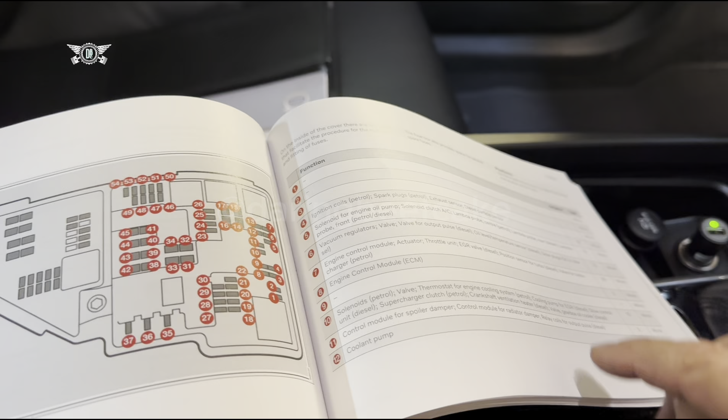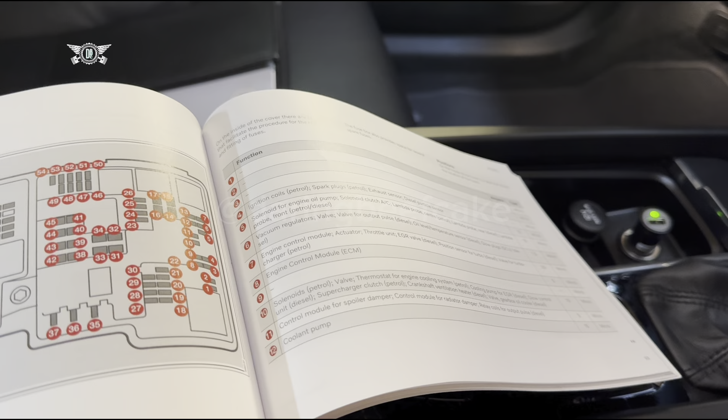On today's video I have this Volvo XC60, a 2019 model. I'm just going to show you the location of the fuse boxes and the list of what the fuses are for. I'm going to film the list so you can pause the video and look at each fuse, what they're for, the ampere rating, and whether they are micro or MCase fuses.

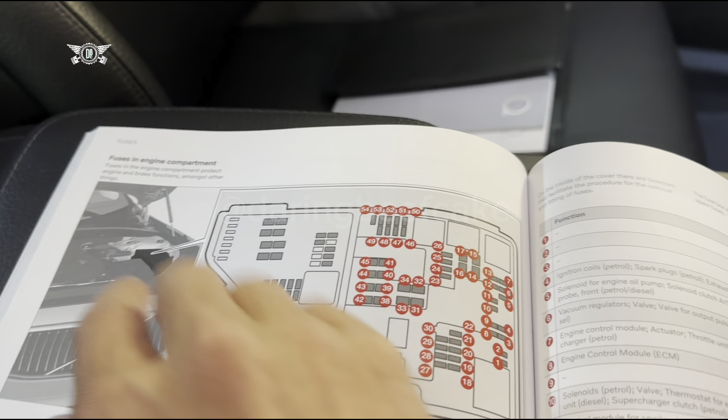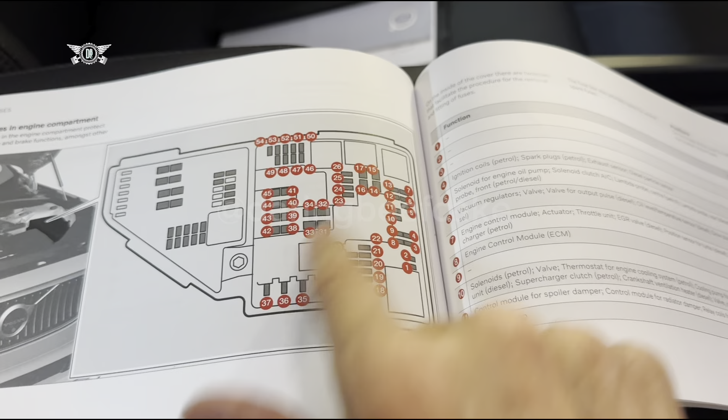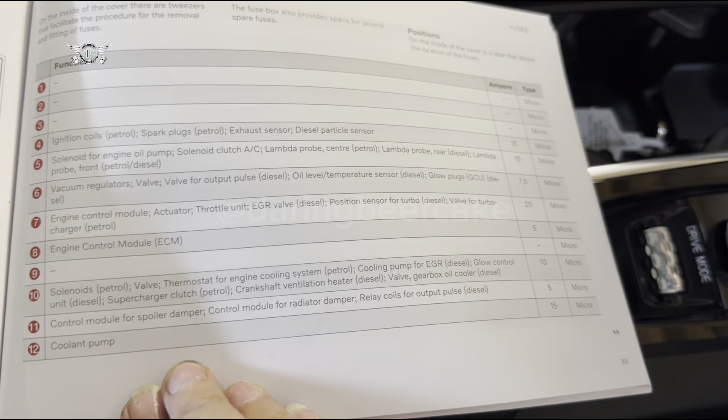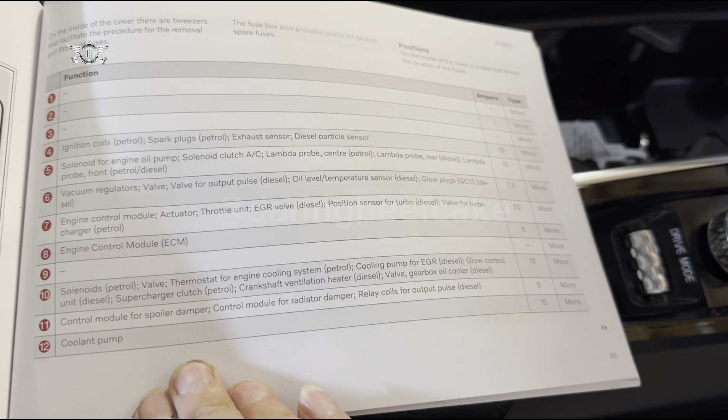This car has a fuse box in the engine bay or engine compartment, as it says there. It looks something like this. It also has some relays, but the relays are not really shown here what they're for. In this page it shows you fuse number 1 to 12, and numbers 1, 2 and 3 are actually not used. Depending on the car, the model, and what features your car may have, you may have more fuses or less fuses. So fuses that are not in the fuse box doesn't mean they're missing, it just means those features are not available unless somebody removed them purposely.

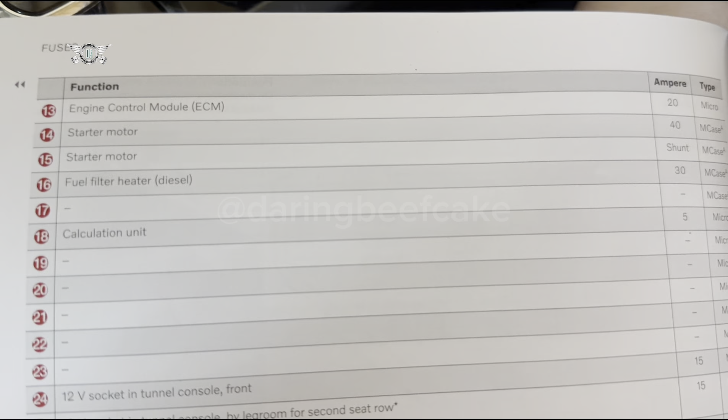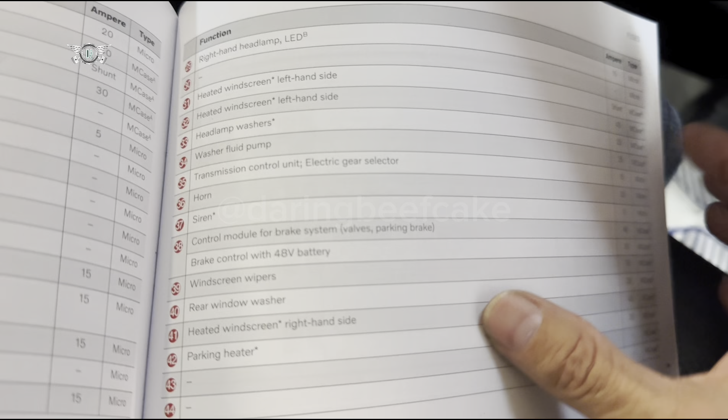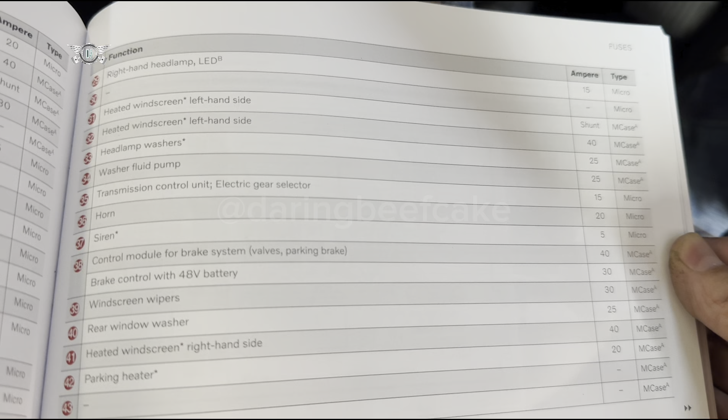So that's our first page. There are some spare fuses as well. Let's have a look at the second page here, where it starts at number 13, and this goes down to fuse number 28. Then we have fuses between 29 and 44 there. And we still have some more here.

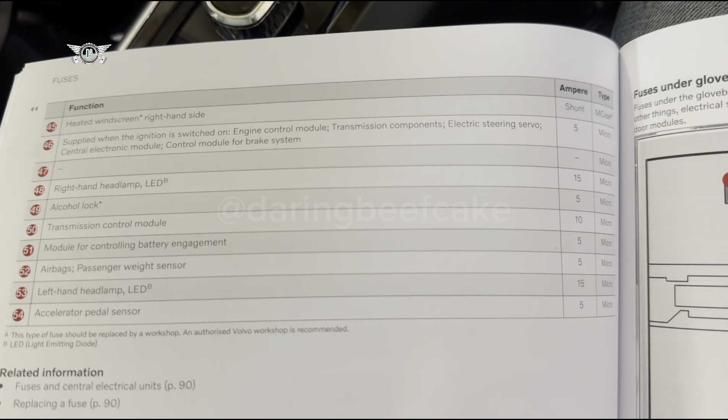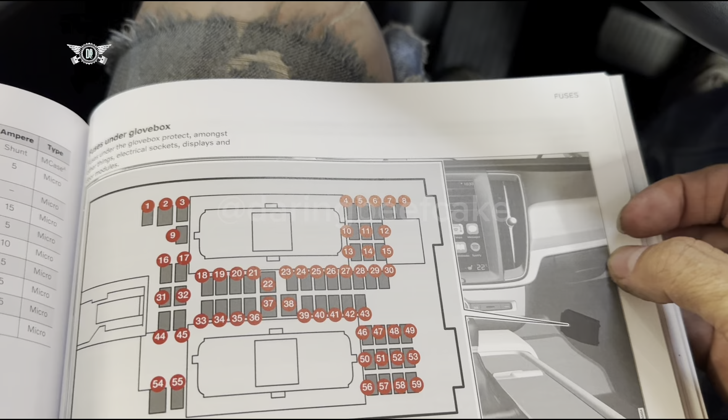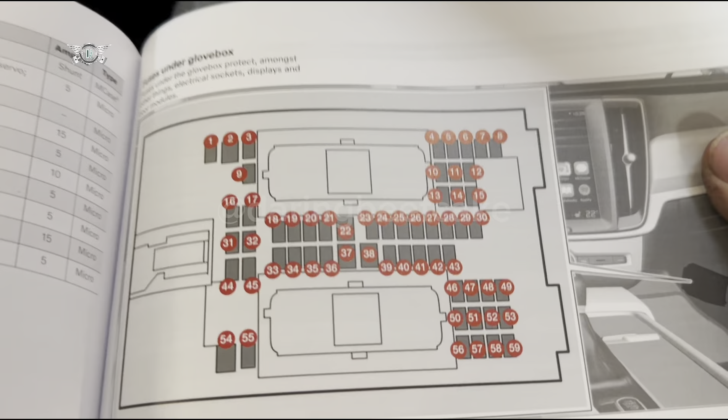Then we have fuses under the glove box, and it shows you a picture of the glove box on this side. This car is right-hand drive, so the glove box is on the other side, unlike in this picture, but it will be the same sort of fuse numbering. That's what it looks like, that's how they're numbered. And we can have a look at what they are for.

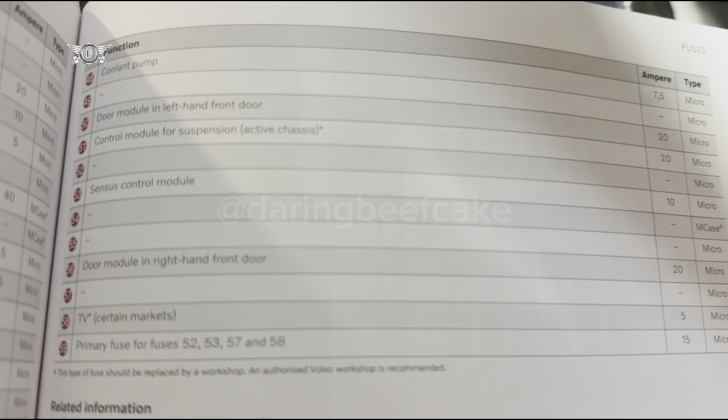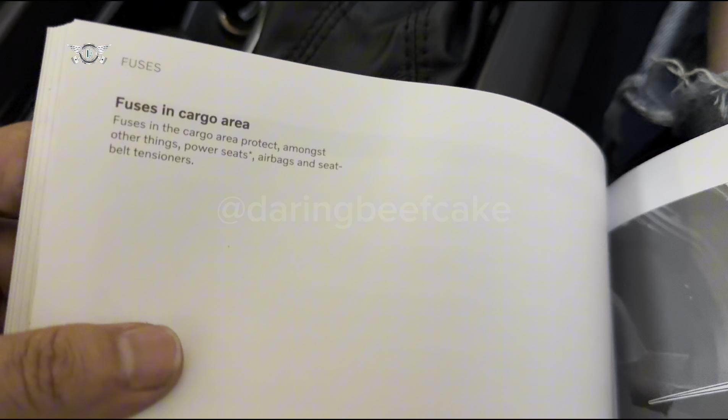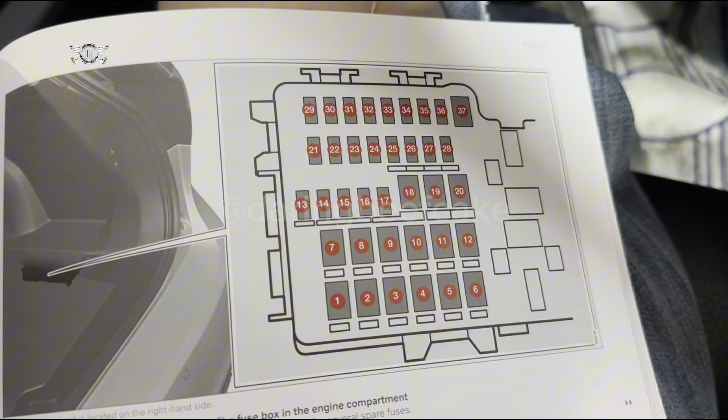And then we have fuses in the cargo area. That's where they are supposed to be. It says on the inside of the cover there are tweezers as well that facilitate the procedure. The central electrical unit is located on the right hand side, so we'll have a look at that as well, and then we can see what they're for.

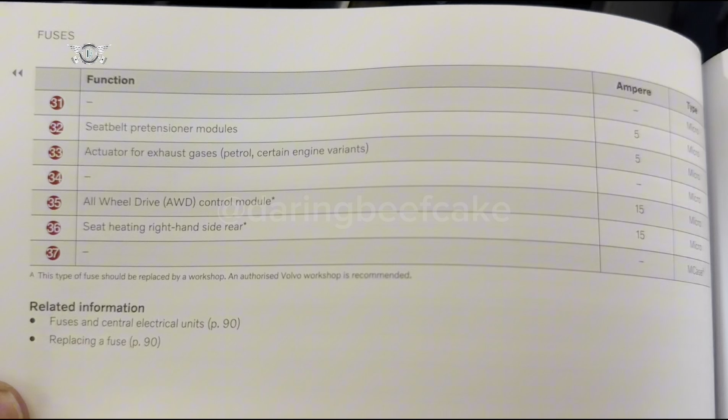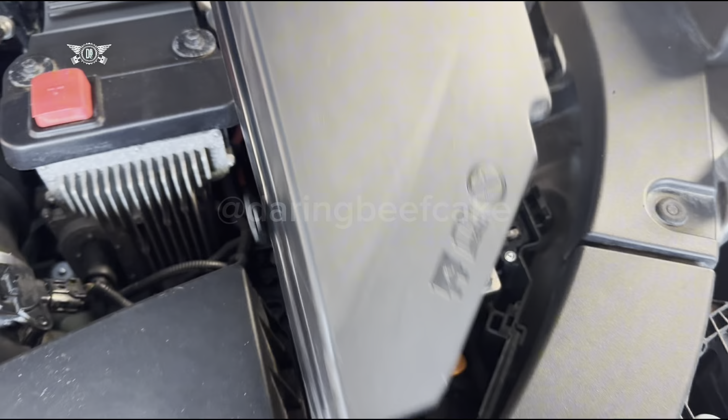Okay, so now we can investigate where these fuses are. We're going to go to the ones under the bonnet first. So obviously you have to get your bonnet open, and then we're going to come this way, and it's going to be under here. There are some clips that you need to press in order to get this fuse box open. In there are your fuses and a few relays. There's a little key for replacing fuses.

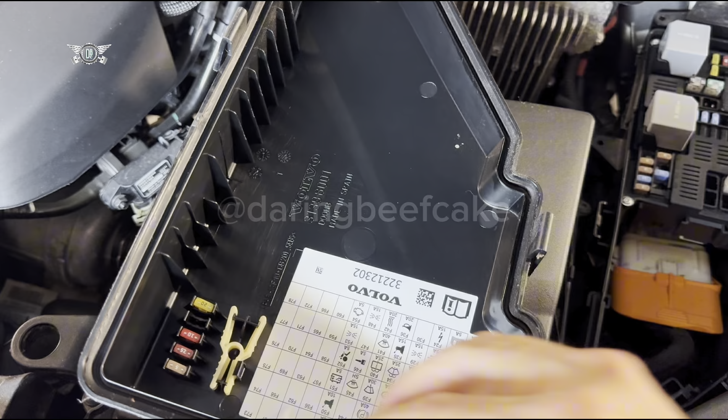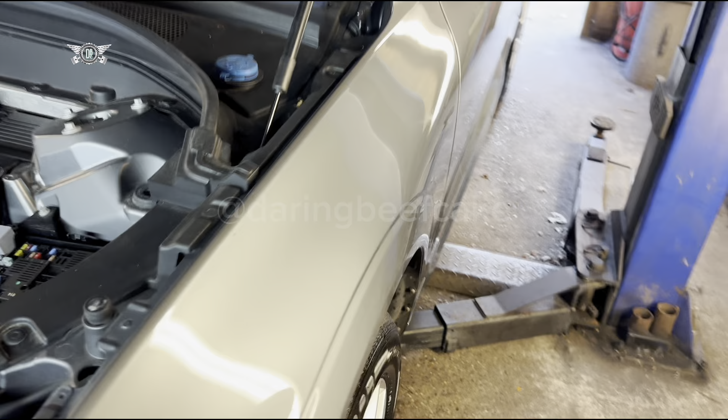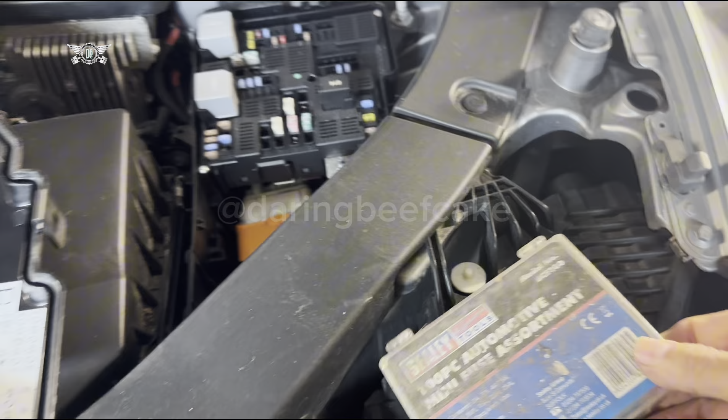In my previous video I changed fuse number 15 here, which was for the 12-volt charging socket, so that's why that one is missing. But I'm pretty sure I have loads of little fuses that I'm just going to refit before I forget. I don't have a micro one though, these are very little micro fuses. I may have one somewhere, but anyway, for now let's concentrate on the video.

So this is the fuse box in the engine bay. Now we're going to have a look at the ones that are supposed to be in the passenger side.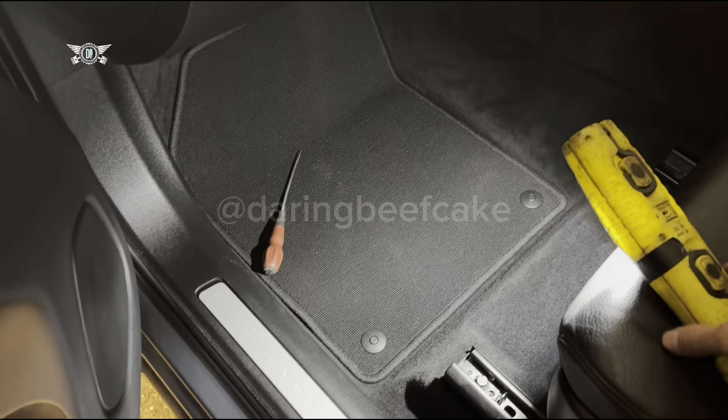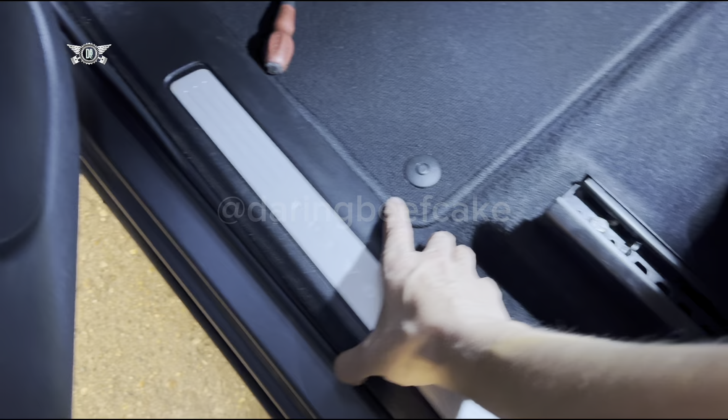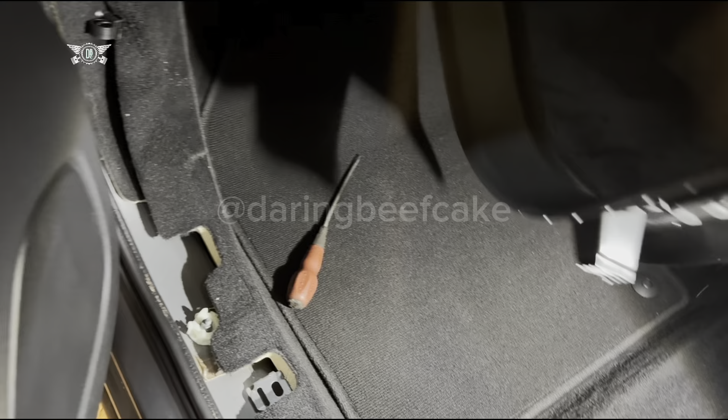Okay, I was just getting my light here. In order to access the fuses that are sitting in this panel, they're going to be sitting behind this bit of carpet. So we need to remove this cover here, and that cover sort of pops up, it literally pulls out, and it may sound like you're breaking something. It's not kind of breaking, it's unplugging from there. So these metal clips here unplug, and this comes out.

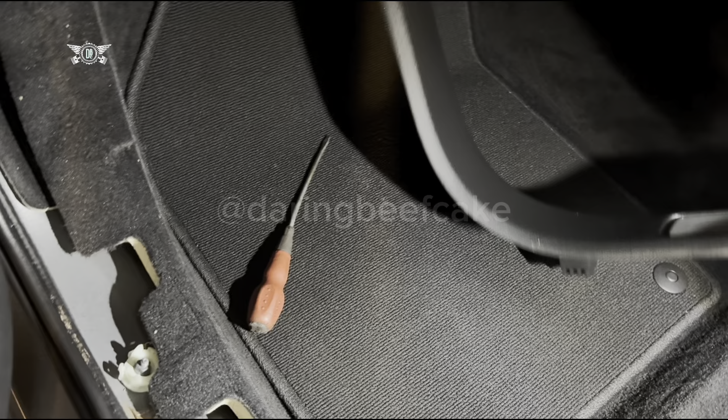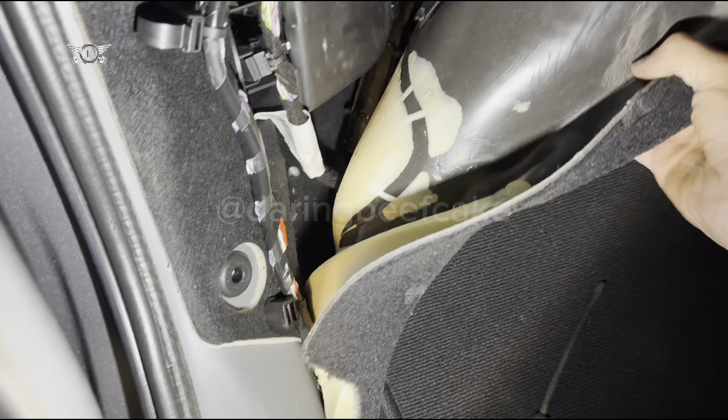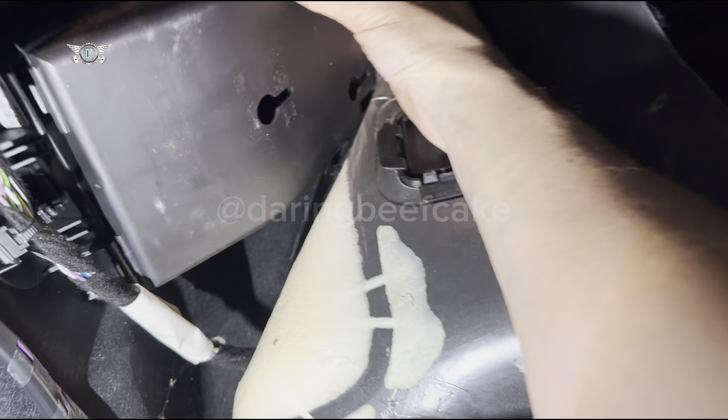Once that comes out, if I can get my light here, if we open this carpet a little bit, we're going to find this cover, and behind that cover is where the fuses are, which looks like this cover was a bit loose already. But anyway, let's take that out, and we can try to wiggle this cover out of here. It clearly needs to swing.

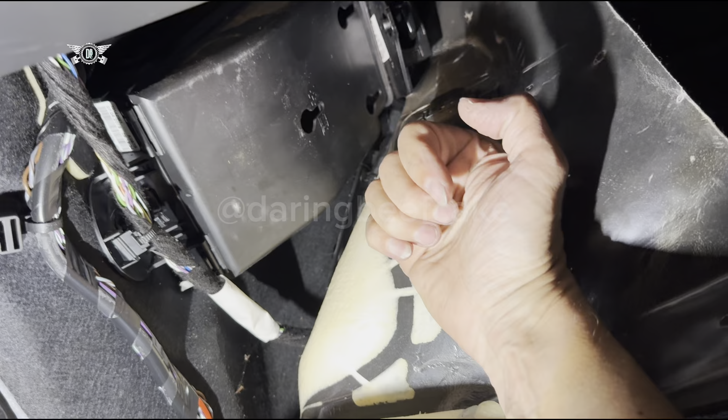I can see it's got little hooks here, so it needs to swing. I'm going to try to do that with my two hands. Okay, yes, just push this down and it will swing out, and that's where the fuses are. And that's the cover. There's some tweezers there as well to get to the fuses. And obviously you have the fuse list, and they are numbered as well. You can just about see the little numbers there.

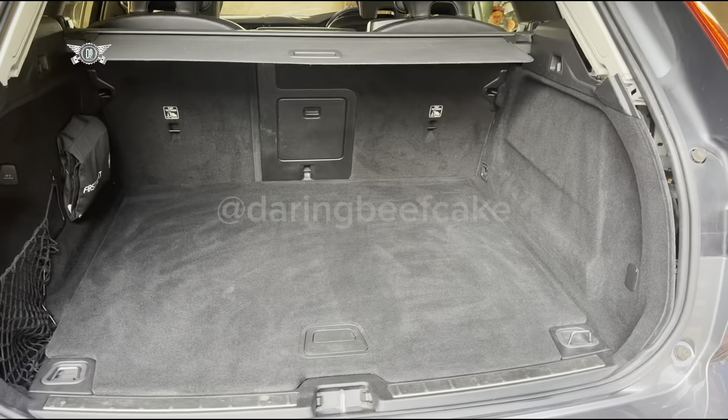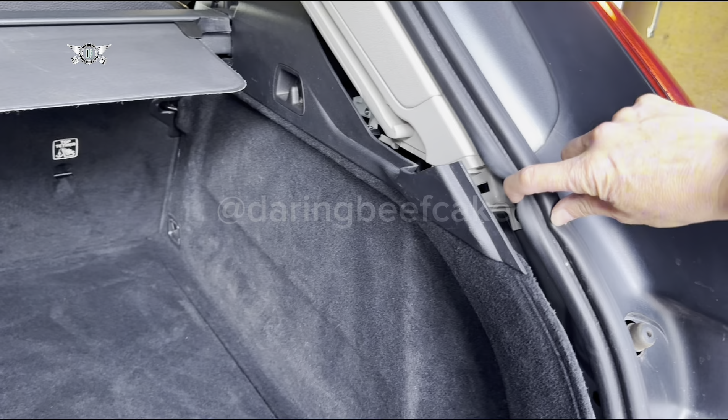So now I'm going to fit this back, replug all these, and I'll show you the ones at the back. Right, fuses at the back. If you open the back hatch and come to the right hand side here, if you pull this rubber open a little bit, you'll be able to get your fingers in here and pull this out. Again, this is just plugged in there.

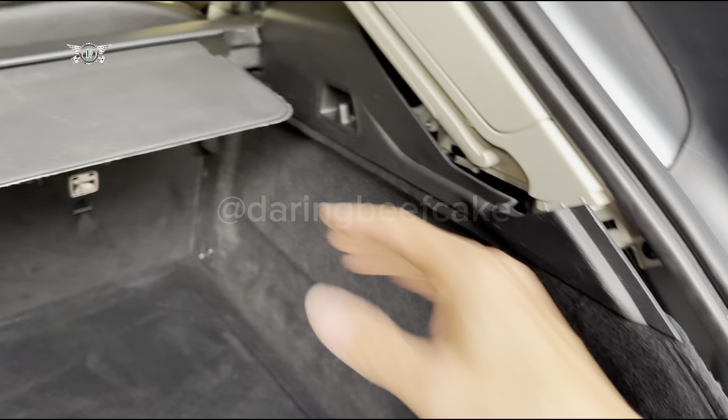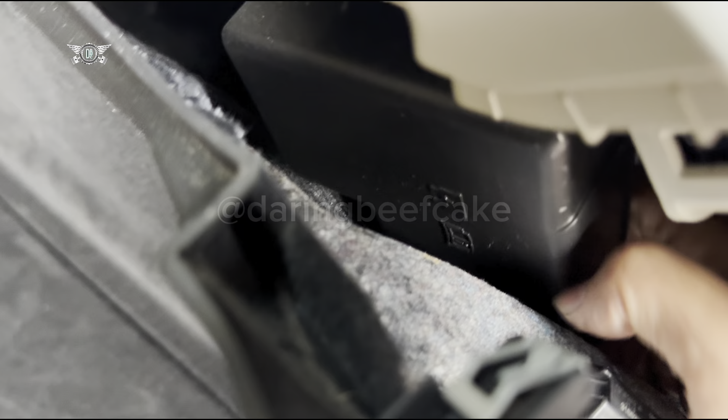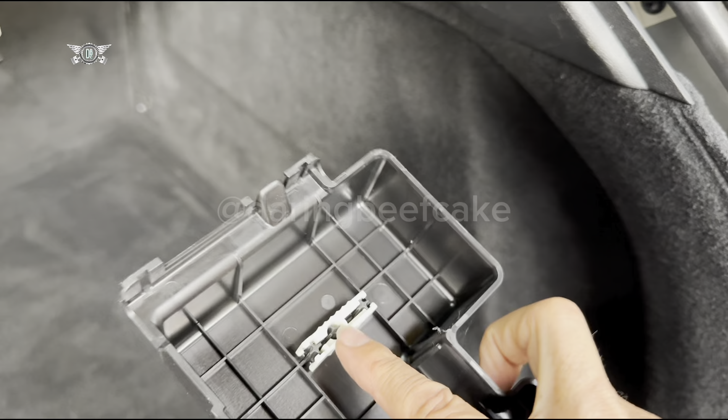So you can unplug it, bring it out a little bit. It would probably be easier if you remove this out. If you take it out, then this might open a little bit more. But I just want to show you where the fuses are, and they are in there behind this cover here. If you take that cover out, it comes out very easily as well, just have to press on that little clip there, and it will come out. There are some tweezers there as well, and that's where the fuses are, and one relay. So there isn't many fuses there, it's just a few.

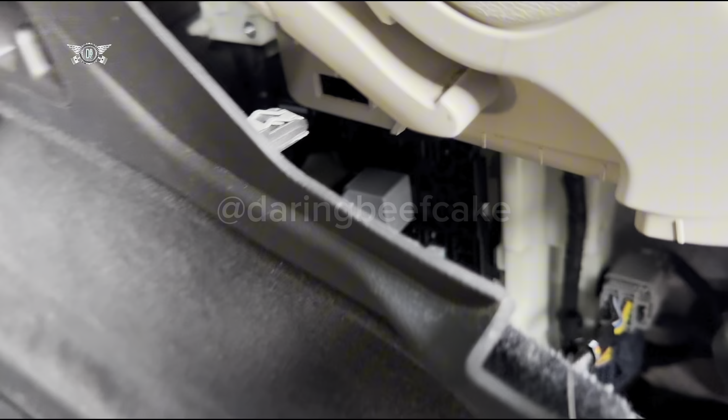And again, it'll probably be dependent on what sort of equipment you have in the car, so not all the fuses are available if you haven't got certain things. And that's pretty much it really. So now I'm going to fit this cover back in there, and then just plug that back in.